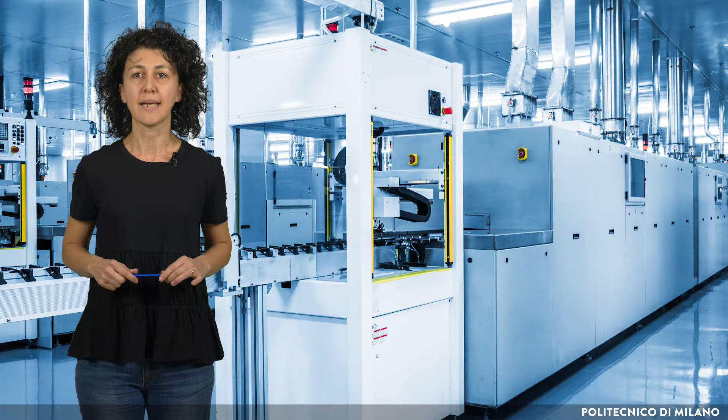Nowadays, modern industry takes advantage of the use of radionuclides and the ionizing radiation they emit for many applications, from the inspection of industrial processes to the enhancement of the commercial value of materials. Their introduction has enabled significant technological improvements and high levels of automation in several industrial processes.

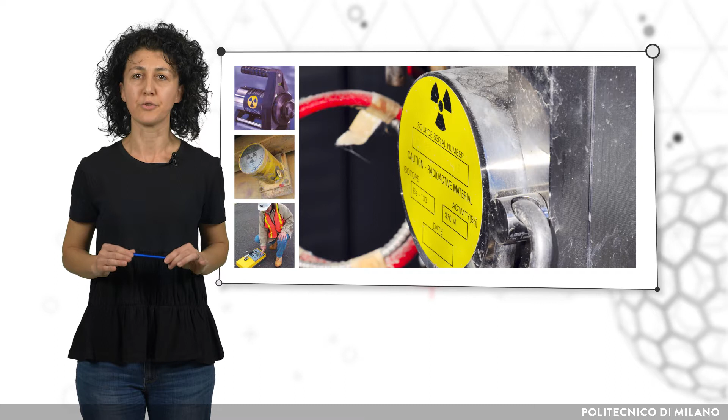The opportunity to put a radionuclide in a sealed container has enabled industrial users to isolate it from the environment and allowed for the possibility of using it as a sealed radioactive source. For example, such radioactive sources are used in gauging systems that help quality and process control.

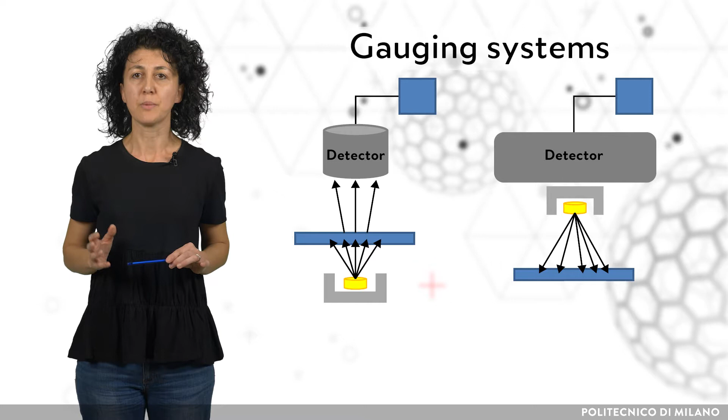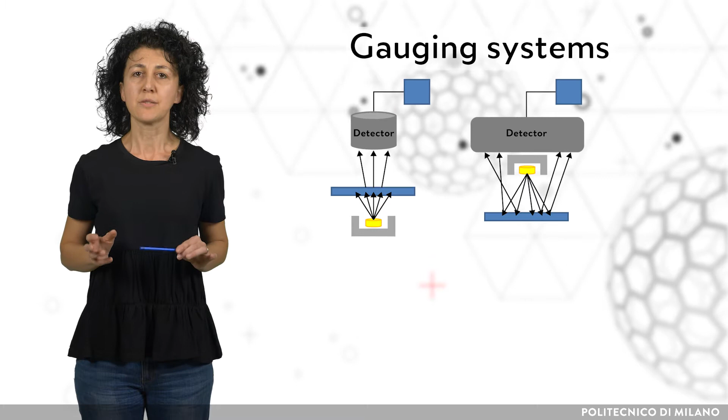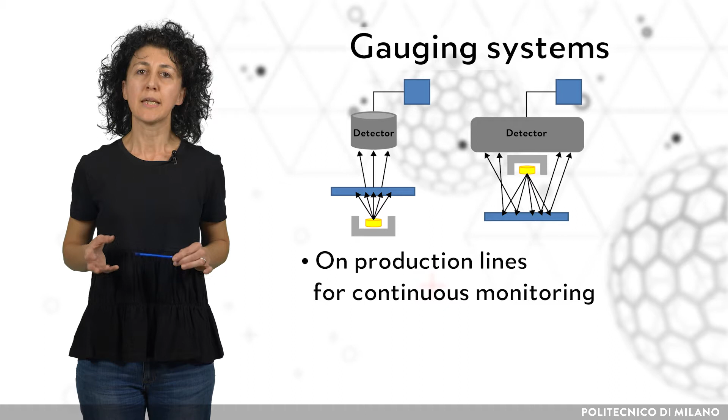By detecting the radiation emitted by a suitable radioactive source that is passed through a material or scattered by it, it is possible to determine parameters such as the thickness, the density, and the integrity of a specimen. These checks can be implemented on production lines for continuous monitoring or used in portable devices. The continuous monitoring enables users to quickly adjust the quality and specification of products during the manufacturing process.

These gauges are called nucleonic gauges or nucleonic control systems. Such gauges are a non-destructive and non-contact technique that allows preservation of the material. They are all based on proven technology that has been in use for decades. The general principle of operation of nucleonic gauges is the attenuation of the signals received with respect to the emitted signals. They are used, for example, in those industries that produce plates, sheets and coatings made of different materials, such as paper or metals, and need to measure the thickness with high precision.

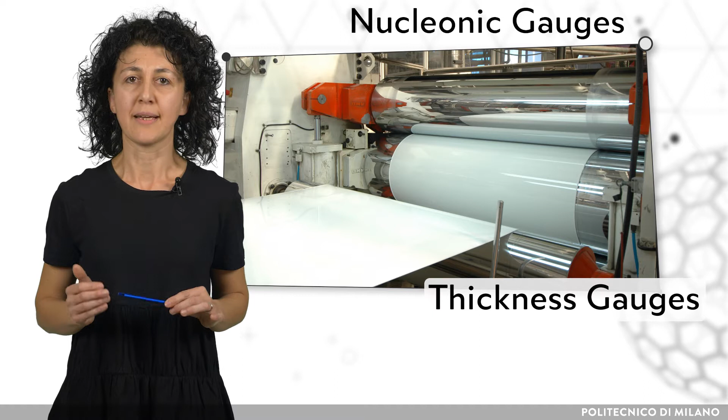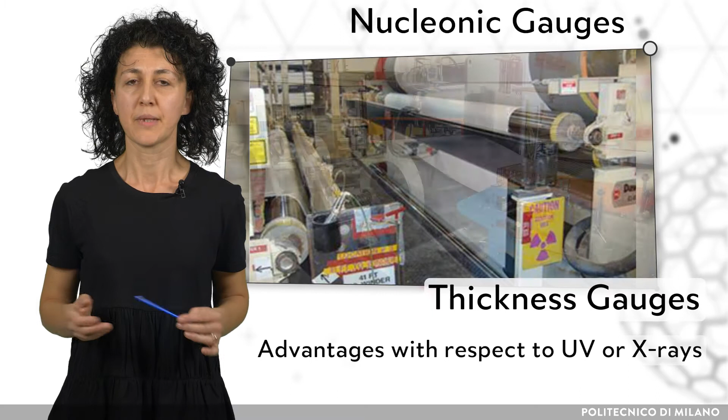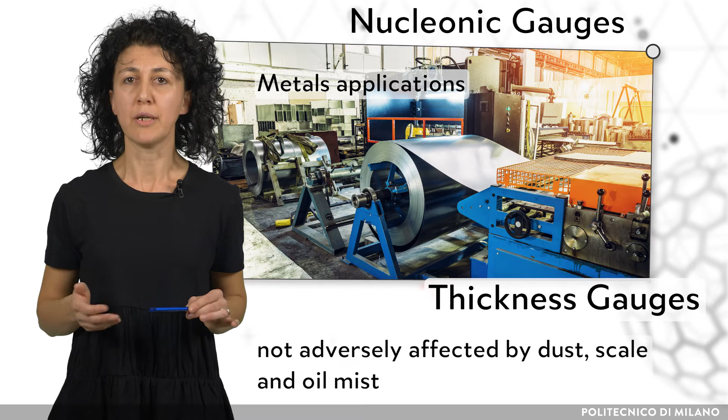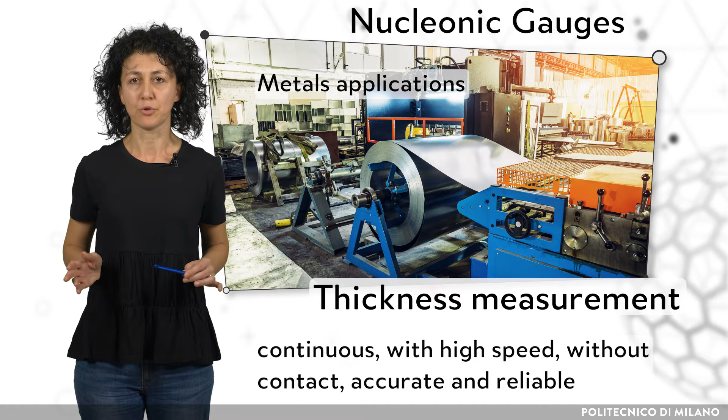Although today's efforts are directed towards the creation of new devices that use UV radiation or X-rays, nucleonic gauges still have some advantages. In metals applications, one of the advantages lies in the fact that nucleonic gauges are not adversely affected by dust, scale, and oil mist. They can be used when metals are dirty, oily, covered with scale, or have large pass line oscillations. Furthermore, the thickness measurement is continuous, with high speed, without contact, accurate, and reliable.

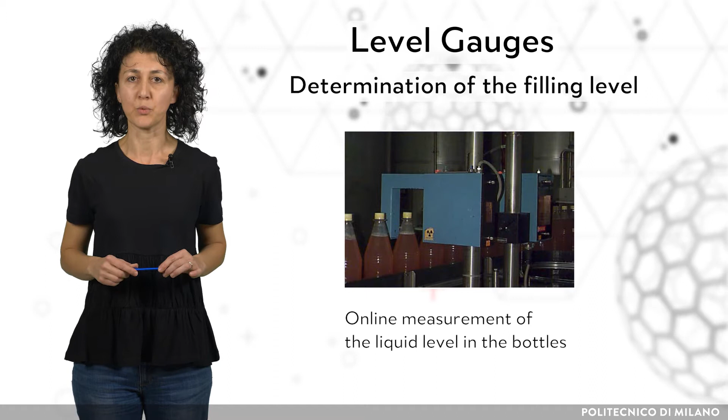Other uses of nucleonic gauges include the determination of the filling level in bottles containing liquids. Furthermore, several portable devices have been developed and have found applications in civil construction and the petroleum industry. In the oil and gas industry, nucleonic gauges are used in particular to support well logging, a fast technique which is able to provide data on geological formations for the exploration of mineral resources.

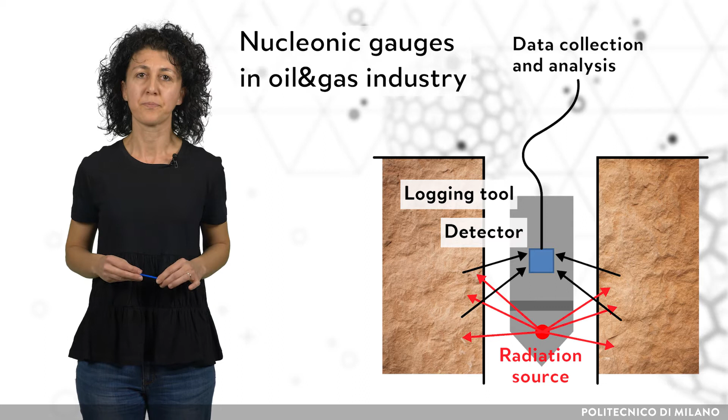Another widely spread industrial application that takes advantage of radionuclides and ionizing radiation is industrial radiography. It is a non-destructive technique used to detect defects in objects without altering them. When we go to the airport, for example, luggage as well as people are scanned. But don't worry, it is not dangerous. Indeed, very low dose X-rays are used in full body scanners. In the case of industry, when higher energies are needed, gamma radiation from iridium-192 or cobalt-60 sources allows for penetration of thicker materials.

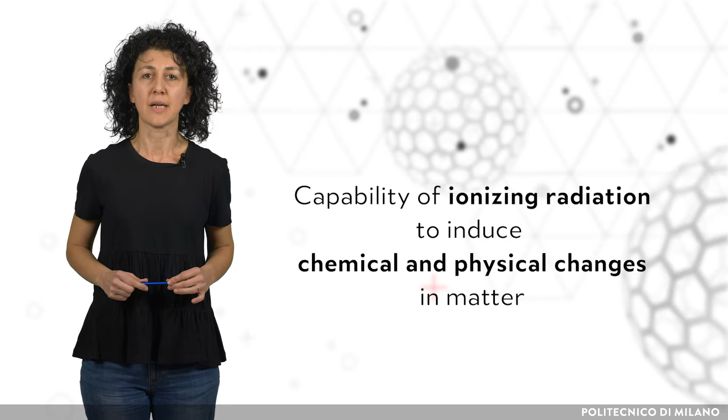When scientists realized the capability of ionizing radiation to induce chemical and physical changes in matter, they started to study their effects. In some cases, these changes damage the material and its properties. In some other cases, these changes led to the enhancement of the features of the irradiated material. This enabled the development of industrial applications where materials' properties can be modified by radiation to produce innovative materials for high-tech applications. This is the case of polymers. This technology started to be applied on polymers nearly 60 years ago. Ionizing radiation, such as gamma rays, X-rays, or energetic electrons, has been used to modify polymers by altering their properties, allowing for a new range of applications.

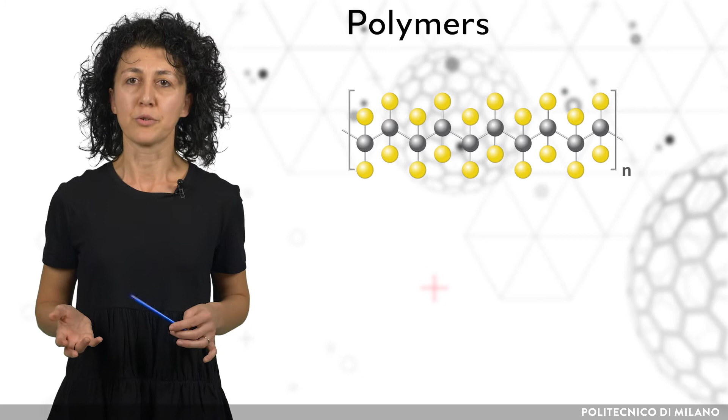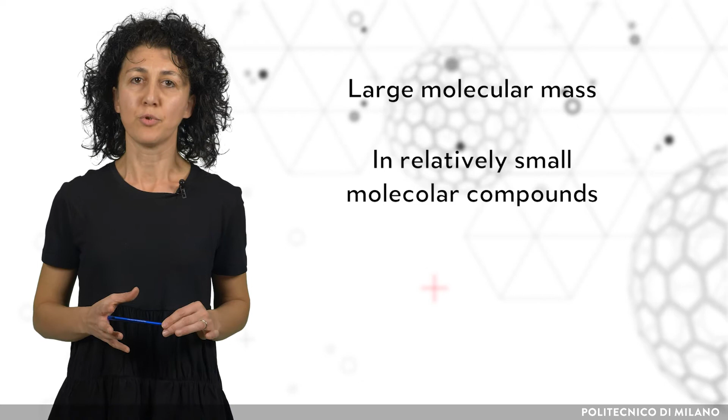Polymers are macromolecules. They are constituted of long chains made of repeating units. Polymers range from synthetic plastics such as polystyrene to natural biopolymers such as silk, wool and cellulose, as well as DNA and proteins. Consequently, their large molecular mass relative to small molecular compounds produces unique physical properties: toughness, viscoelasticity, and the tendency to form glasses and semi-crystalline structures.

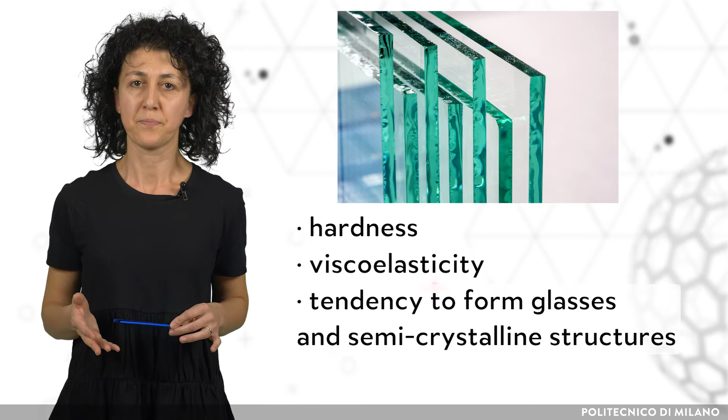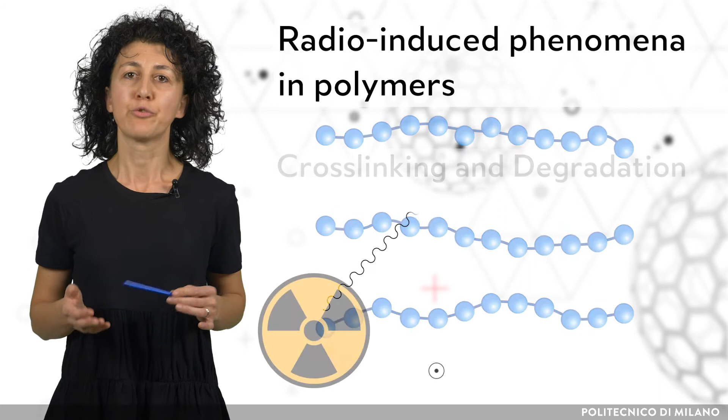There are different phenomena that can be initiated by radiation. The most important chemical changes are cross-linking and degradation. Through cross-linking, radiation creates new bonds between different chains. Through degradation, radiation breaks them, thus making the chains' length shorter. Both processes alter the structure of the polymer and its properties. These phenomena can be effectively exploited to improve the usefulness and the value of commercial products, and by taking advantage of the predominance of one or the other, different results can be obtained.

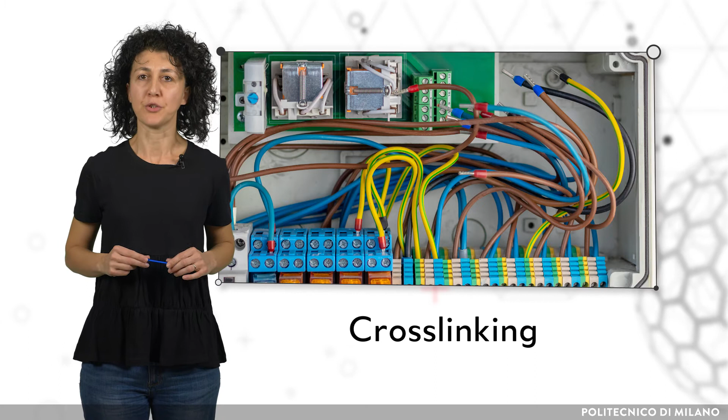Cross-linking by radiation is used to produce high-performance wires and cables for insulation. It improves heat tolerance and resistance to abrasion. It is used to produce heat-shrink products for telecom and power applications or films for packaging. It allows the synthesis of hydrogels, obtaining high water concentration and increased elasticity. Hydrogel wound dressings enable wounds or burns to heal faster than with other medications.

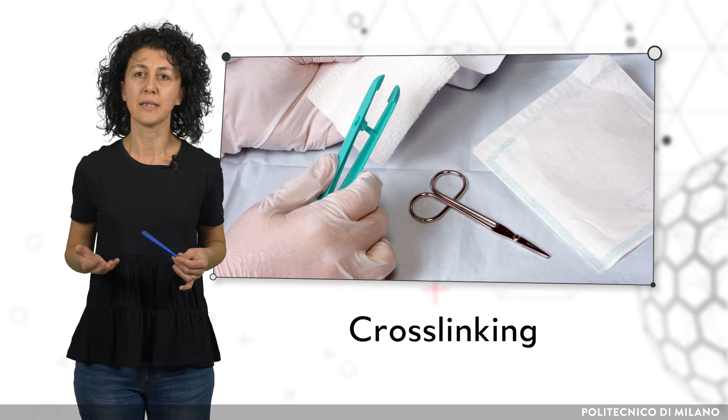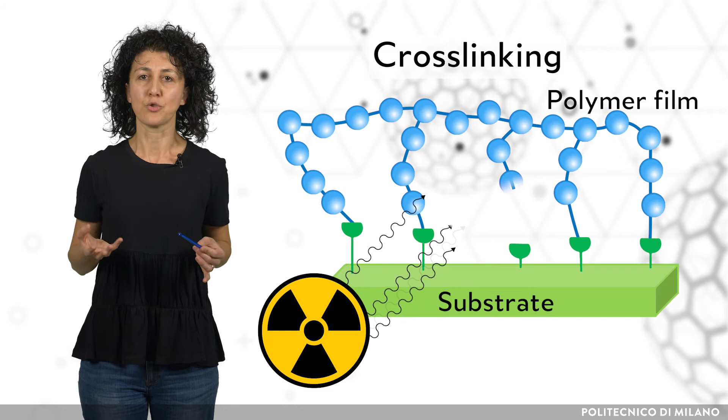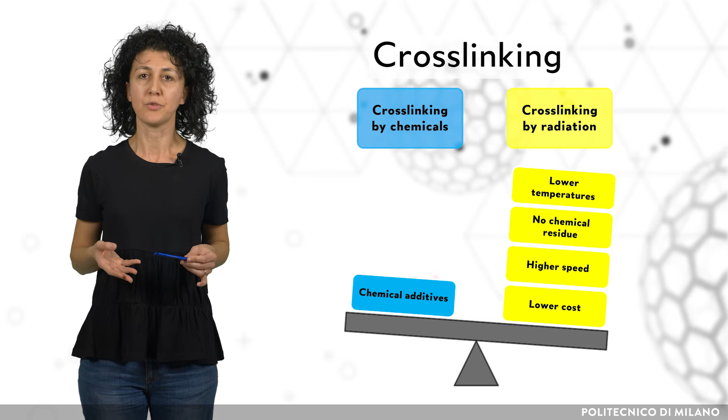Cross-linking is exploited in a specific treatment to apply coatings to surfaces. It is used to increase the adhesion of inks or also to functionalize surfaces, altering the wettability. Cross-linking can also be obtained chemically, thanks to the use of additives. However, among the advantages of using radiation, there are lower cost, higher speed, lower temperatures, reduction of chemical residue, and in some cases, better material properties too.

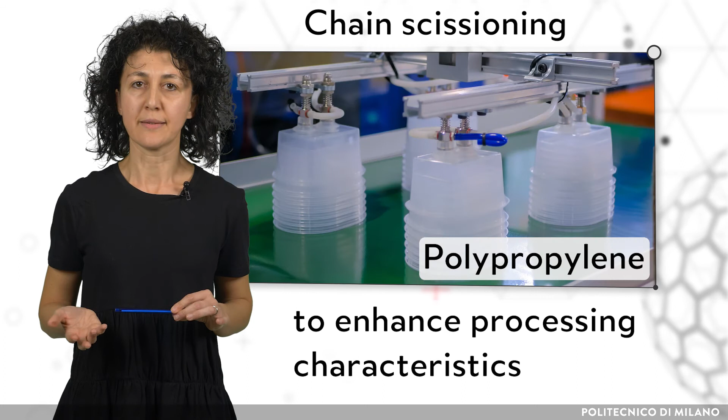The opposite of cross-linking, chain scissioning, is used to enhance processing characteristics: on Teflon to be used as filler, on polypropylene to enhance melt flow characteristics, allowing alternative means of molding. We can find a lot of examples of radiation polymer processing in the objects we usually use every day, to cook, to take care of our health, to protect food, and so on.

In the optic industry, an anti-reflective coating is applied to improve the efficiency of the lens. In an eyeglass lens, it reduces eye strain, improves vision, and makes the wearer's eyes more visible to others. Radiation-cured, solvent-free coatings and inks are used for magazines, newspapers, and a variety of packaging materials. This method can utilize less expensive and less reactive materials and does not require costly initiators.

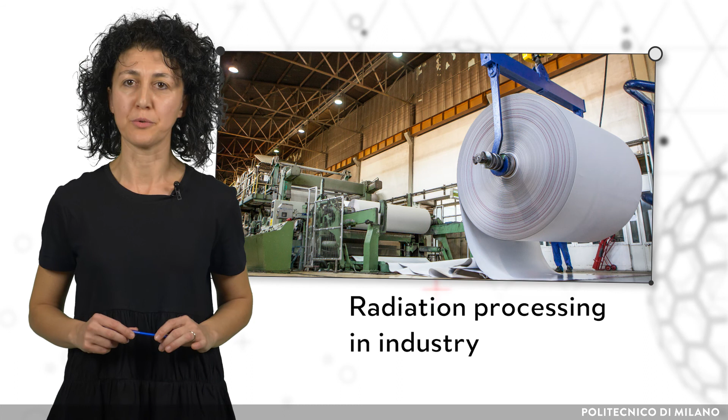Radionuclides and ionizing radiation can be very useful to industry. The presence of experts is necessary to manage the sources used in nucleonic gauges or to control the radiation processes to modify polymers. Of course, the use of radioactive sources or ionizing radiation in industrial plants requires the adoption of suitable measures to protect workers' health and the environment from radiation risk.